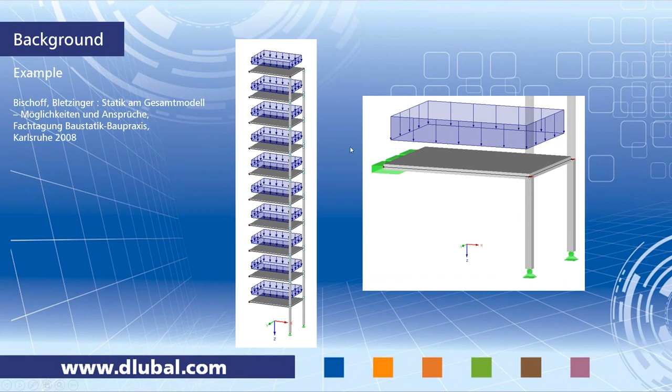If you would calculate this model in RFEM as the whole model, it will look like the left graphic. There you can see construction stages are not taken into account. There's just one calculation for the whole building. All the 10 stories are calculated in just one step with all the 10 surface loads.

In the graphic of deformations, in the results, you can see that the deformations are increasing toward the top of the building. That means we have the minimum deformation on the bottom and a maximum on the top in red color. This is like a hang-up effect of the ceiling surfaces, an addition of deformation from the bottom to the top, so you will find the maximum bending moment and the maximum deformation on top.

The question is: does that calculation represent the real behavior of the build-up process or the real behavior of the structure? It is clear that the whole building with its 10 stories is not built in just one second or one step. It will be built step by step—first the first story, then the next one, and so on.

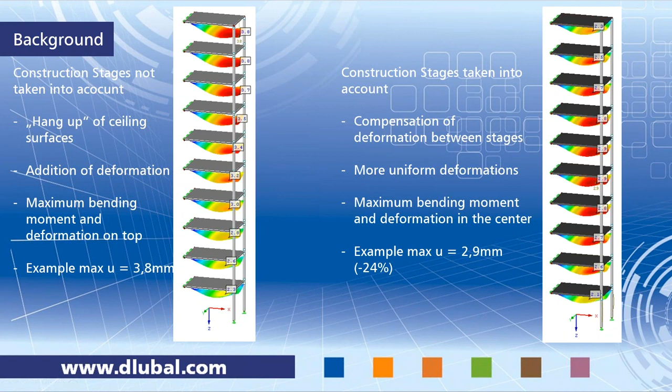So with this information about the construction stages calculation, we want to take a look at the features of RF-STAGES in the next slide. What are the features of stages?

Of course, you can add or remove elements. That means, as I did in the example of the high-rise building, you can add columns, surfaces, and even solid elements in several stages. You can remove them, like for temporary columns, just in the first stage or second, whatever. You can remove these, or you can even modify elements. You can modify materials, hinges, and even supports.

specific stage you can use temporary loads. That's the next point in this slide. What does it mean? For example, you have a temporary load like a crane or something like this in stage number 2, representing some construction workers or a construction truck maybe, and you want to inspect a combination of different positions of this load. So this is what you can do with temporary loads, and these are acting only in the stage and not in a following stage.

So with these features, we want to move over to RFEM, and there I've already created a small model for today's webinar. We have a small building, concrete and steel.

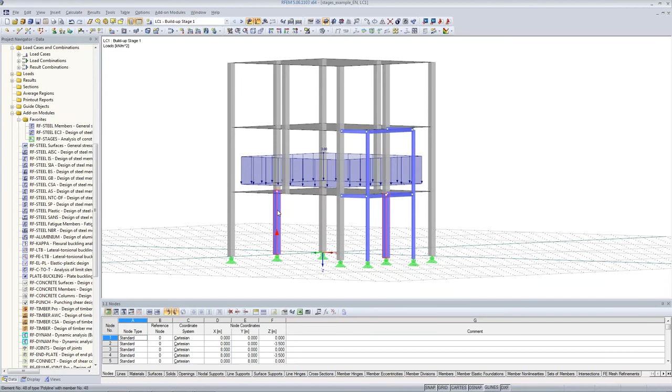We have 3 surfaces, a lot of concrete columns over there, and we also have temporary columns over there, these two steel columns and a small temporary platform. I already created the load cases.

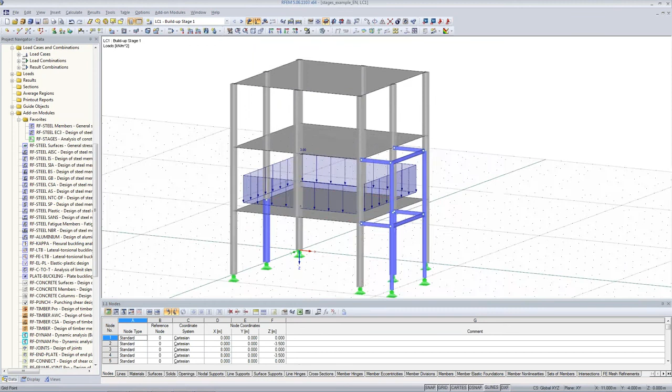It means we have build-up loads for stage 1, stage 2, and stage 3. As you can see, it's an important fact that you have to split up the loads for the stages calculation. So I want to prepare 3 stages. That means the first stage, the bottom of the building, then the next stage will be added in stage 2, and then the final stage where I want to remove the temporary frame over there.

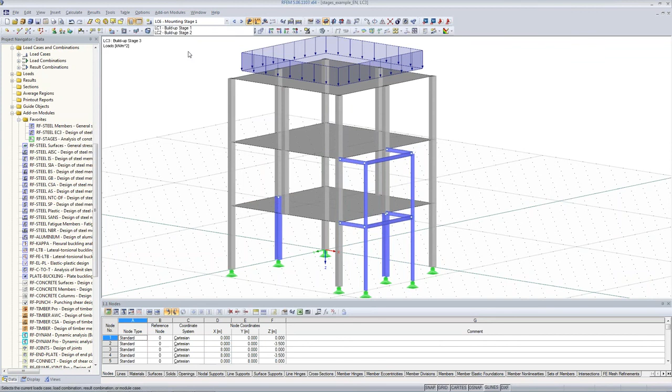And in the second stage, I will already remove these 2 temporary columns. So it's important to split up the loads. This is built up for stage 1, stage 2, and stage 3. And we also have mounting loads—these are the temporary loads on our platform.

So right now we want to start with the module RF-STAGES.

By double-clicking on this module, you will find the general data, which is used to define the stages. We have 3 stages here. You can write down a description, or use a template like construction stage 1, 2, and stage 3.

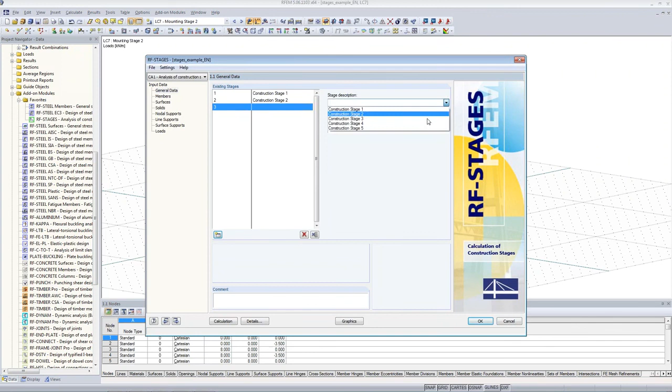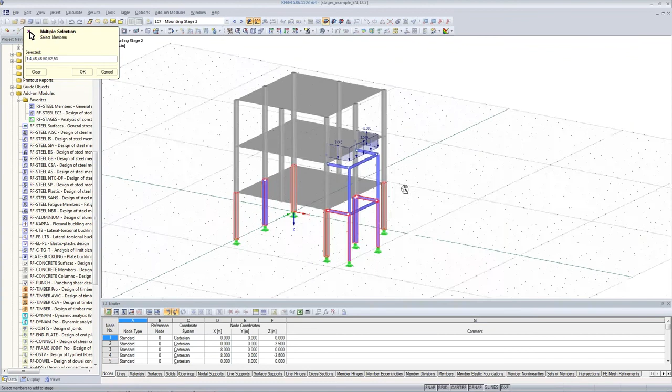Then we go on to the Members dialog, where you add the members which will be added, removed or modified in each particular stage. In stage 1, you cannot modify, delete or remove anything, because there's no stage before stage 1. So we start by adding something: all the columns and the 2 horizontal steel beams.

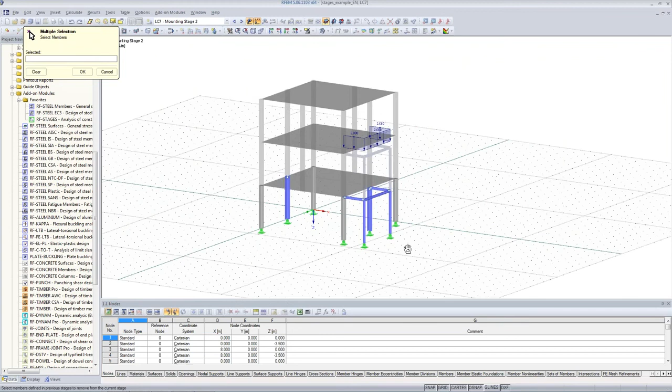In the next stage, we want to add not these columns, but these members, and we want to remove the 2 temporary columns at the bottom of the building. In the last stage, we build up the concrete columns on the 3rd floor and remove the temporary frame. As you can see in the graphic, you can follow the selection in the RFEM background.

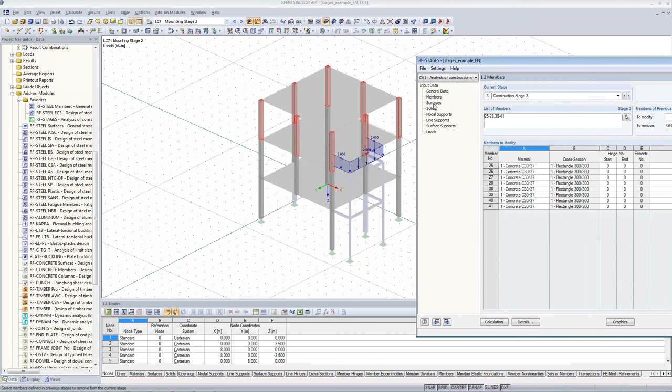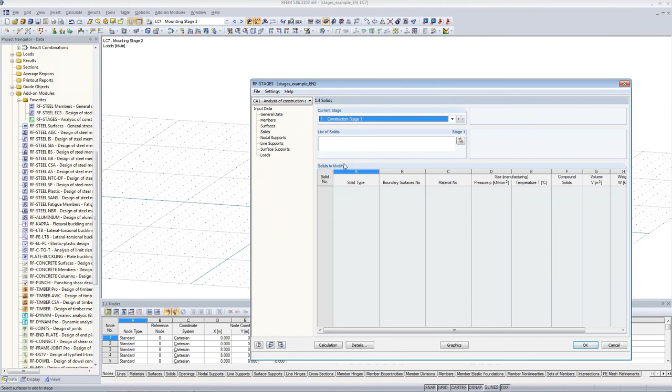So that's construction stage 1, 2, and 3. Now we want to add the surfaces. That's quite easy: stage 1 gets surface 1, stage 2 gets surface number 2, and in the last stage there's the roof surface. We don't have any solids in this model, so we can go on to the Nodal Supports.

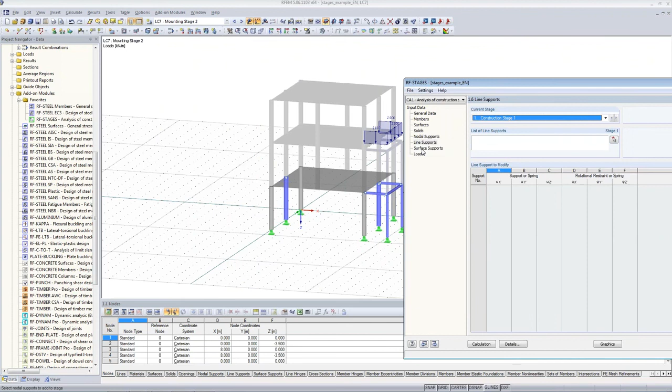We will just select all of them. We don't have to remove the Nodal Supports, because once these temporary columns are removed, there will be no load left on them anyway, so we can just leave them as they are for all stages. We don't have any line or surface supports either, so we can go on to the loads.

In our stages, it is possible, as you can see in this mask, to add permanent or temporary loads. Permanent loads are, for example, self-weight, or any load case or load combination that should be taken into account in every stage, so it's a constant load for all the stages, like build-up loads and live loads.

In this example, I created load combinations for the several stages. You can also use load cases or load combinations, or even use them together. In stage 1, I prepared load combination number 1, so I add this there. Stage 2 gets the loading for stage 2 as a combination, and then stage number 3.

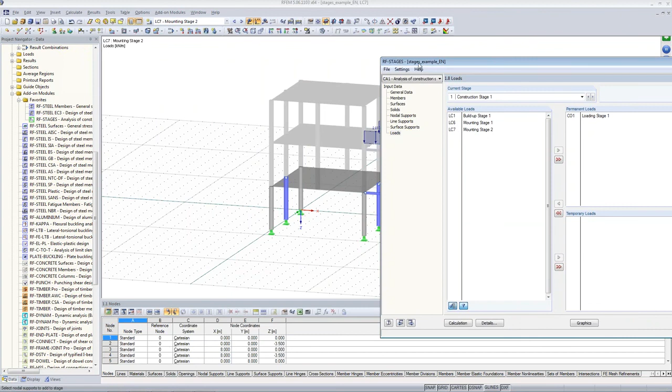What about the self-weight? Self-weight is a special type of load in RF-STAGES. You can add the self-weight as a separate load case for every stage. In this example, I could create 3 load cases of self-weight, but this is quite time-consuming, and in this combination there is no self-weight active, because we can use the 'assign self-weight to all stages' checkbox instead.

And because I used partial safety factors in the load combinations, I want to change the factor in self-weight Z to 1.35, for example. On the lower left side you can find the alignment of new elements, like initial position, which is exactly the same as in RFEM, or tangential position, which is the position of a new element relative to the previous stage — this might be more important for bridge construction.

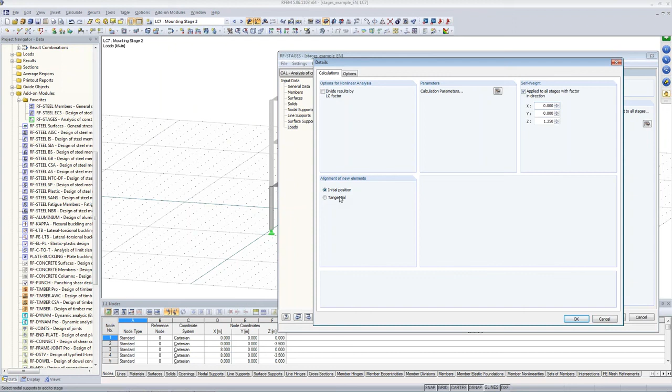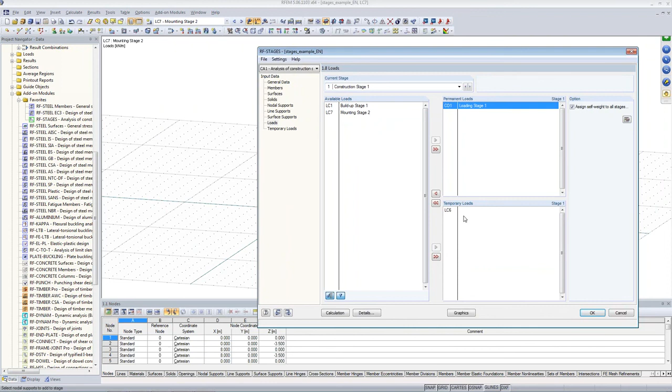What else? We have 2 mounting load cases, and these should act only in their separate load stage. So I will add load case number 6, mounting stage 1, as a temporary load case for stage 1, and mounting stage 2 as a temporary load case in the second construction stage.

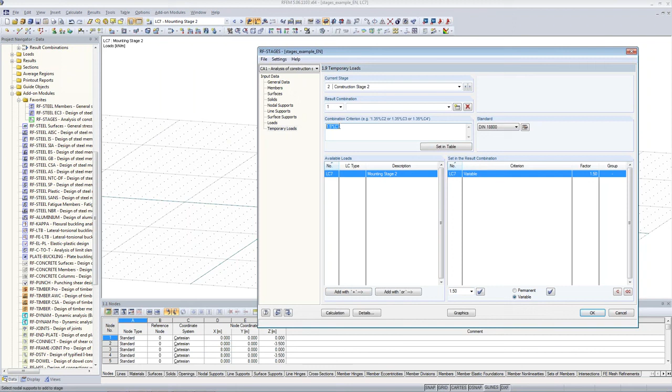To combine more than one load case, you could use temporary loads, but in our example we have just one mounting load case. So I will add it with a factor of 1.5, for example, for construction stage 1, and then the next one for stage 2, also with a factor of 1.5, load case 7.

And with these definitions, we can start the calculation. You can see that there's a separate calculation for each construction stage.

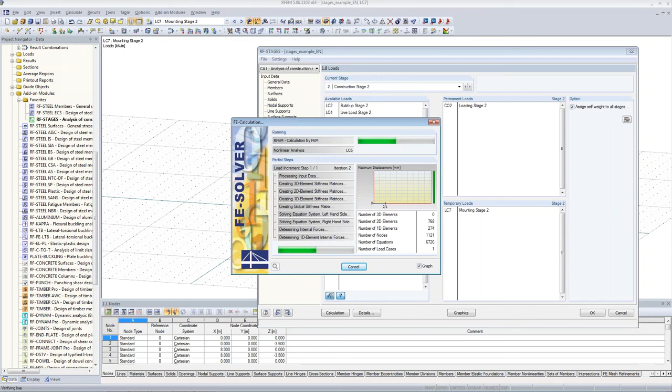After that, all these results are combined together as an envelope of all construction stages. You can check the results in RF-STAGES in several tables, results, nodal supports, for example, construction stage 1, temporary load cases, and an envelope of all the construction stages, including temporary construction stages.

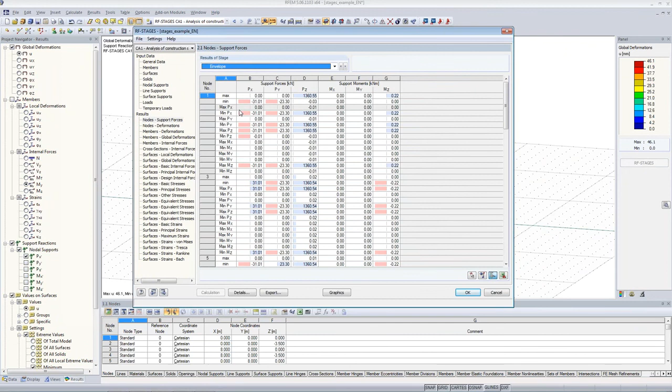Right now I could do nothing with these results. I can do no design because they are just in the module, so to export them to RFEM you can easily click on the export button, exit the module, and you will get result combinations in RFEM.

Right now we can just stay in the module and check the results in the graphic. On the right side you'll find a panel with the envelope, or you can take a look at one PLC, which is the permanent load case, permanent loads for stage 1.

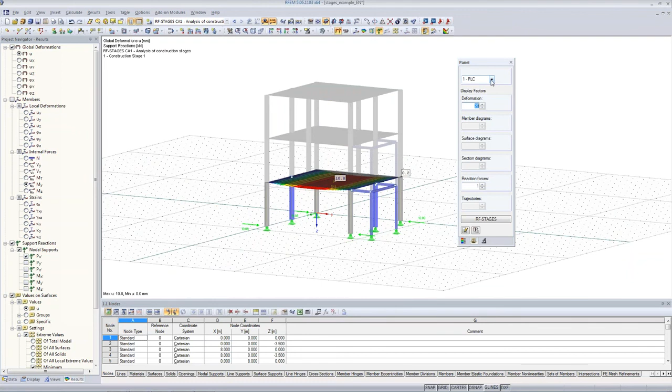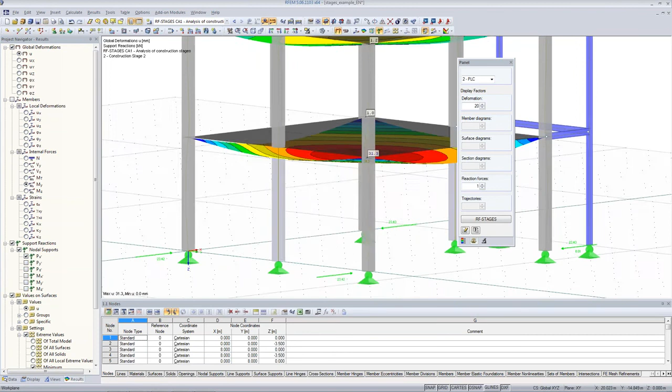We can take a closer look at the structure, and you can see that there was a temporary steel column, with no deformations there. In the next stage this column is removed, it's in the background now, you cannot select anything, and you can see a deformation on the ceiling in the second stage.

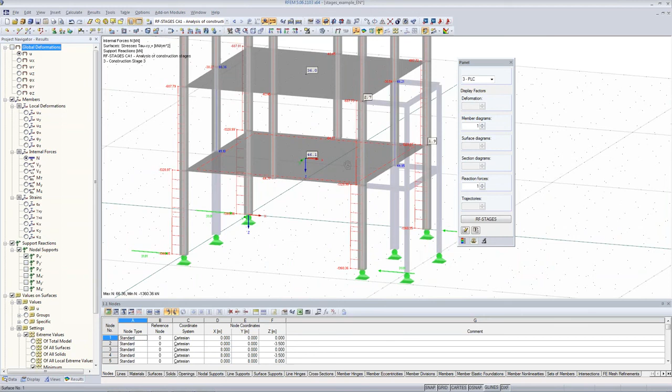You can check the normal forces in the temporary frame, and in the third stage you can see that this frame is also in the background, grayed out, so there's nothing. It's removed in the last stage, and this is the final result, or final stage.

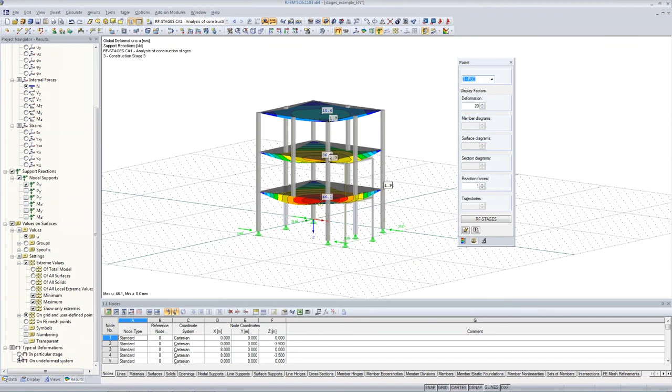I also talked about a feature to show the type of deformation, meaning an undeformed system or in the particular stage. So if I want to know what size of deformation is in the last stage of the structure, I can change this option to 'in particular stage', and you can see that in the last stage you get an additional deformation of 15.6 millimeters on the structure.

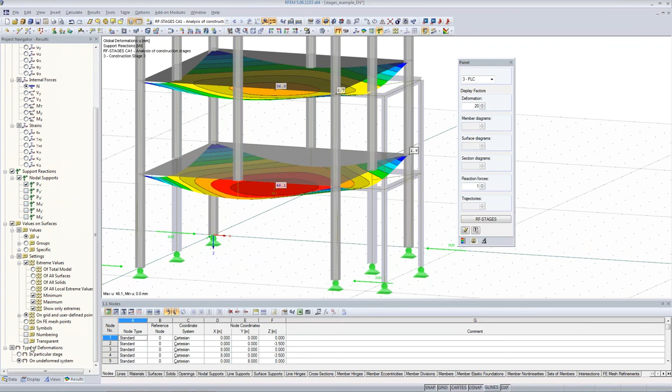On the undeformed system it's 46.1 for the first floor. That means the total deformation of this surface is about 5 centimeters, but in the particular stage, the last stage, it is just 15 millimeters.

Right now I can do a small design with these result combinations of our stages, for example in the steel members module. You can use these combinations, or you can just use the envelope to get a small elastic stress design, for example for these columns.

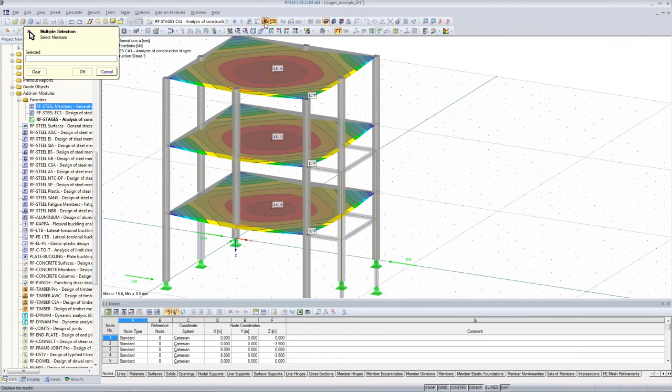First of all, I have to switch off the partial view mode to get these columns working.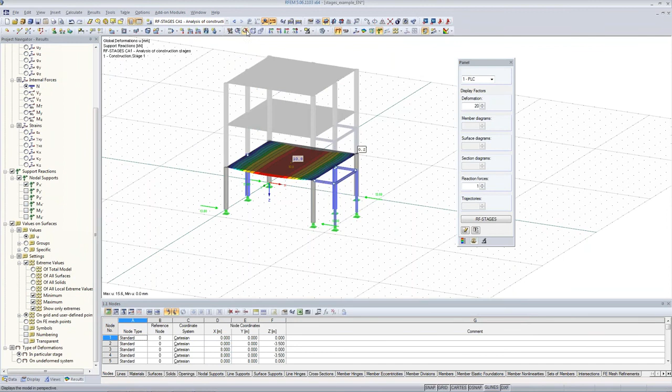So this is stages. Now I can use it in our RF-STEEL Members module, and I can add these columns for design, for example these two temporary columns, and I want to check the envelope of all the construction stages on these columns.

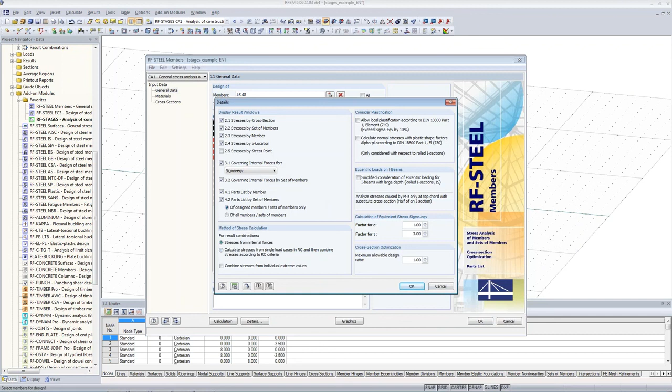Therefore, I will change the method of stress calculation for result combinations to stresses from internal forces and run the small design, and it's just about 7%.

With this small example, I want to close the presentation, and I will hand over to my colleague for some additional information for you.